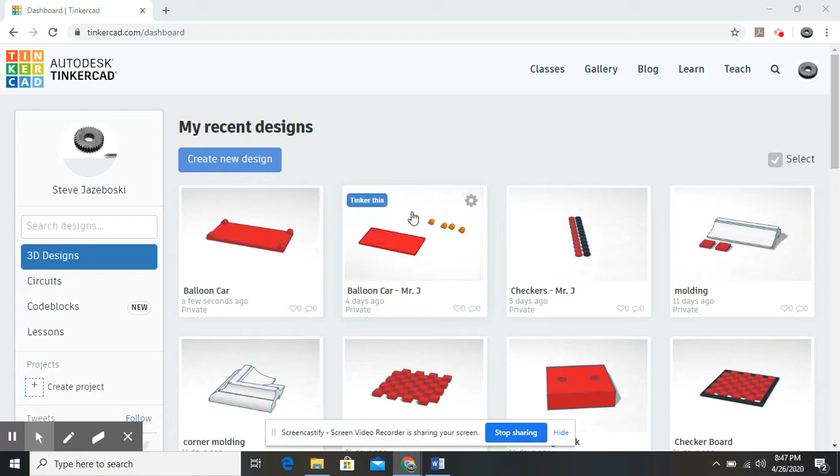We're going to start today by opening up our project once again. Here's the project we're working with. Remember, when you put the pointer over the top, you go up to Tinker This, you click on it, and it will open up for you.

Once this opens up, we should have the base that we created last time, and these 4 small cylinders that we're working with. From here, we're going to align these cylinders today, and we're also going to make the part that will become the axle that will go through both of them, which is actually more of a hole than an actual object.

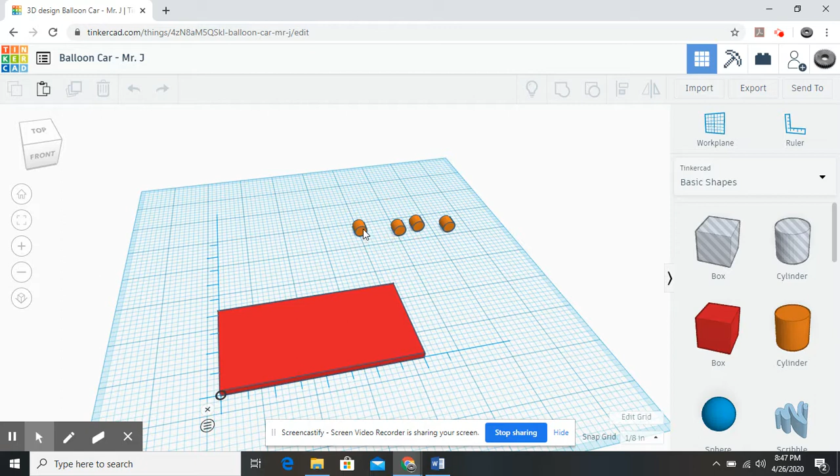So with this, we're going to start with our first small cylinder. We're going to click on this, and we're going to reposition it. This first one's really easy. It gets repositioned to 0x and 0y.

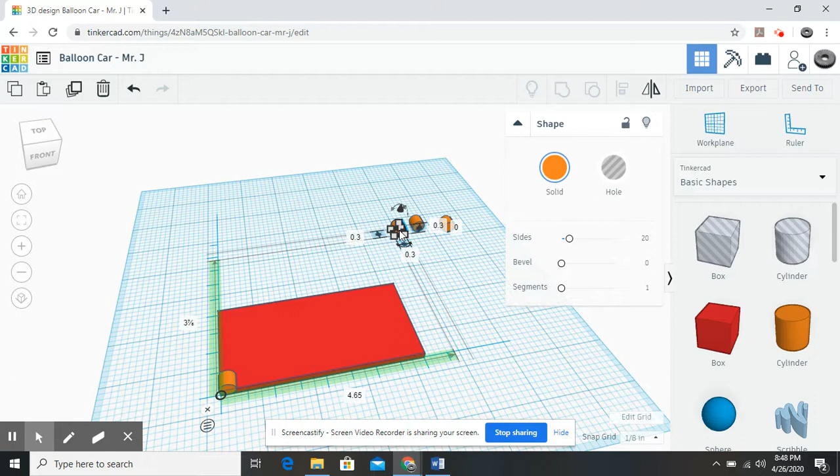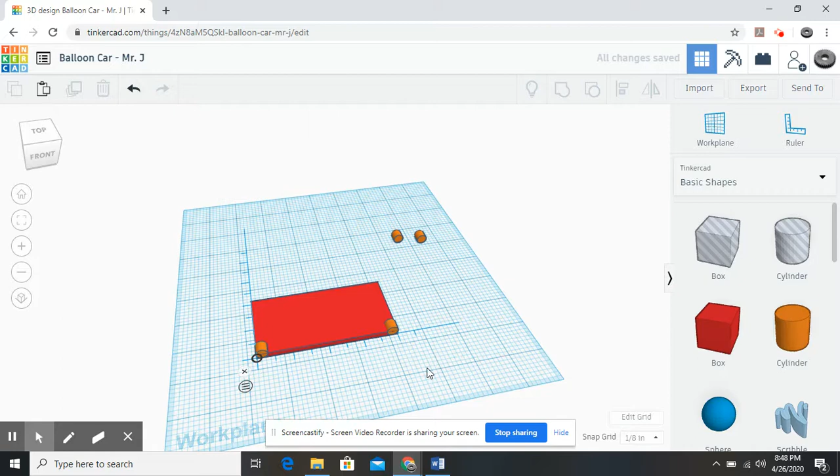Once we have that first small one positioned, the next thing we're going to do is click on the second small one. Our second small cylinder is now going to be positioned to 0y and 3.7x. When we have that in place, you can see that it lines up nicely with the back, nice and even. The front's nice and even. We're in a good spot so far.

Now, we're going to do the same thing with the third cylinder, but this time we're going to move it to the top left corner. So our X is going to be 0 once again, and our Y is going to be 1.7. That should be even with this edge as well as this front edge of the base.

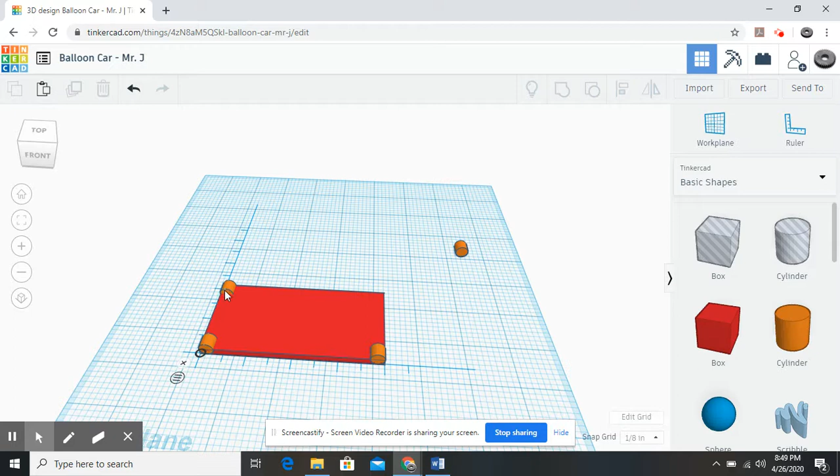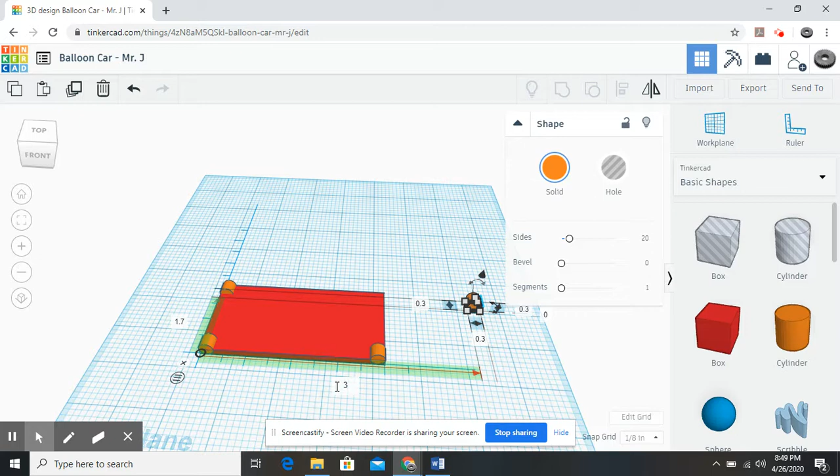We have one more cylinder left to do, the fourth cylinder. And with this fourth cylinder, our Y is going to be 1.7, and our X is going to be 3.7. So now we have all 4 of those put where we want them to be.

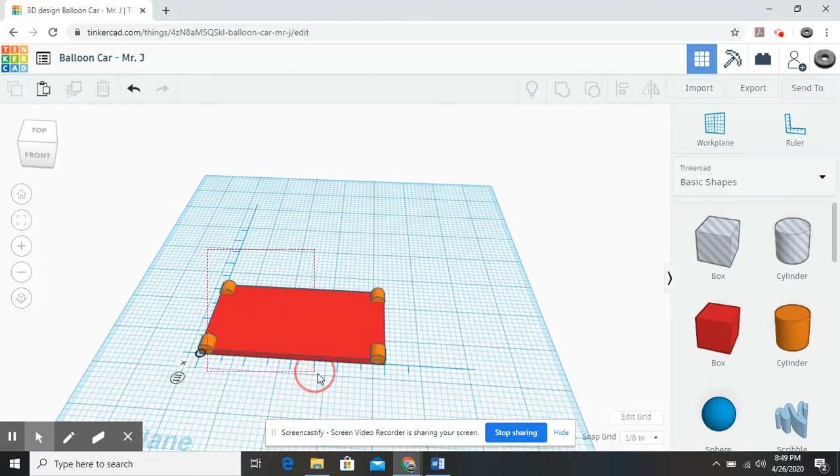Then we're going to group this, so remember to group it. We're going to move our pointer up to the top left of our base. We're going to left click and hold, and we're going to drag this open. When we release, it selects all the parts. Then we go up here to the group tool once again - it's right here, more towards the right of the screen. Click that, and it'll all become the same color.

So now we have the base and where the wheels are going to be placed. What we need to do now is make a space for the axle that will go through, which will actually be a small screw that will go through the tire. So to have a starter hole so we can put the screw in a lot easier, we're going to use this cylinder, and we're going to select the one that's the hole shape.

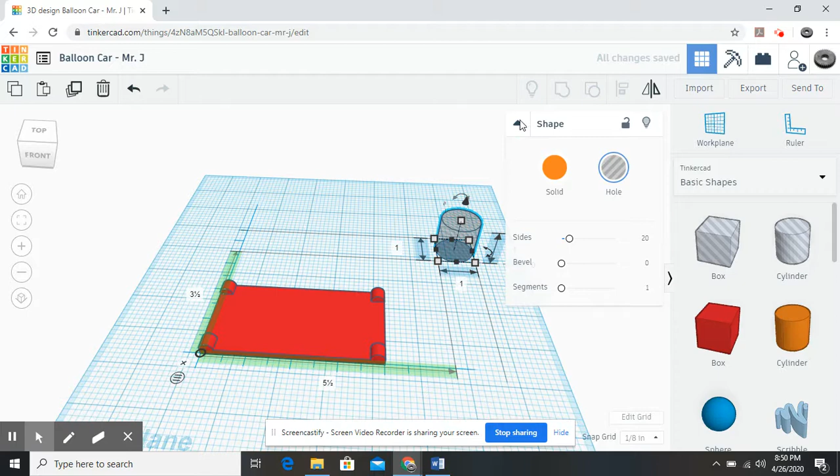We're going to slide this out. Now when we have this out, the first thing we're going to do is rotate this 90 degrees. We want to rotate this so if the cylinder's here, rotating 90 degrees makes the length of the cylinder parallel to the base.

So I'm going to select - you got your 3 little arrows. This one, you can see, would, on this side, this is more towards the X side, this is the Y side, and our one down here would just rotate it in a circle, which wouldn't do much for us right now. So we're going to go up here to the Y side. You can see it's parallel to our Y axis - that's what I mean by that.

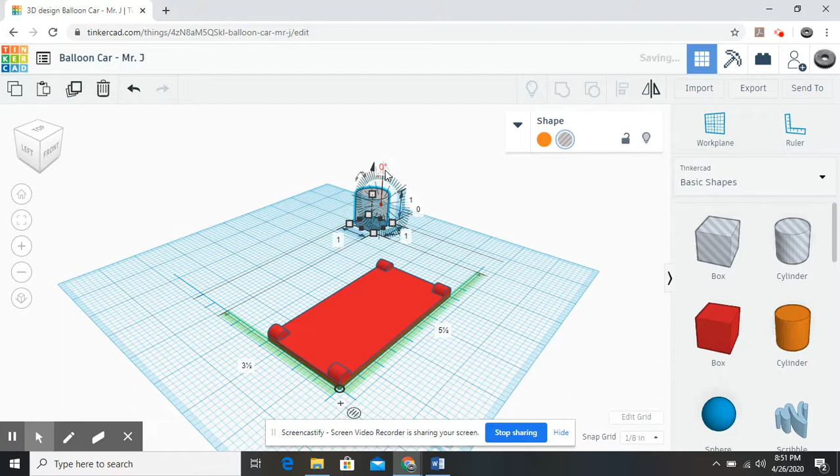We're going to click on that. We're going to go up to the 0, and we're going to change it to 90. Now we have our cylinder - the length is parallel with the Y, and the circular side is facing towards the X.

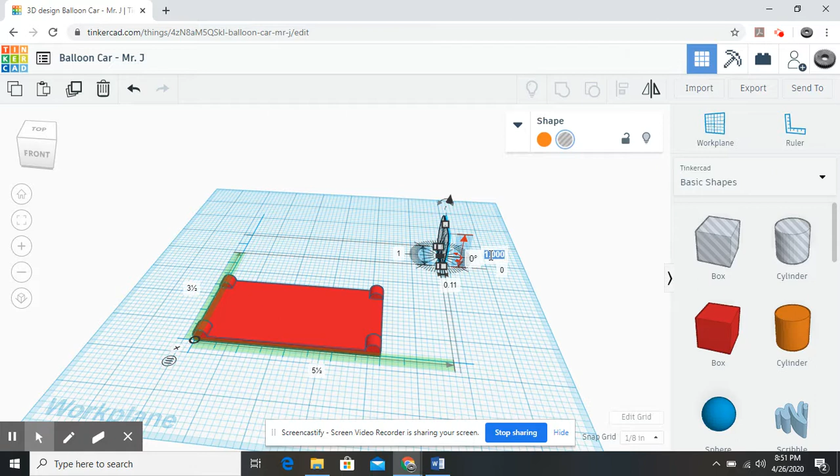Now we're going to select this again, and we're going to change some of the dimensions. First, we're going to change the width, and that's going to turn into 0.11. Then we're going to select the height, and that's going to change to 0.11. And the last thing we're going to do is the depth, and that's going to change to 2. So this eventually will put through the circles we just put in place.

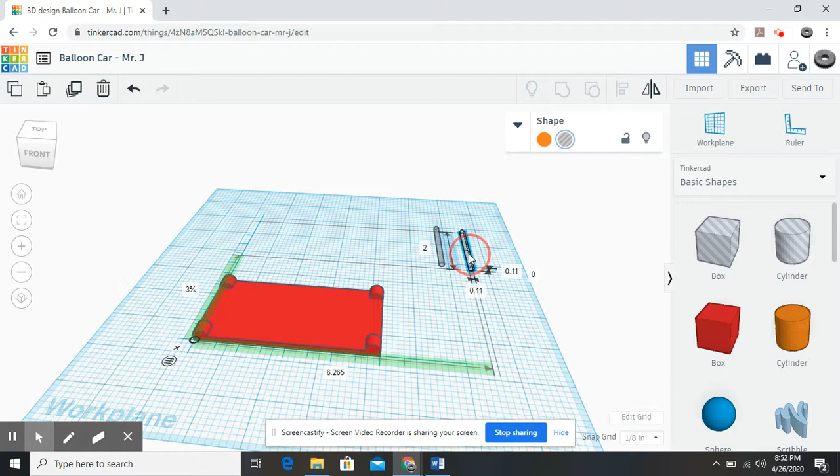We are going to need one for the front and one for the back, so we're going to select this again, go up to the copy - remember, copy is on the top left here, the 2 squares. Click on that, go to the paste. I always like to click off it, that way we don't mess up and accidentally change the size. And we're just going to change the position of that second axle. So we now have 2 axles.

And this is as far as we're going to go today. Hopefully you guys can accomplish this, get this done up to date. And from here, we'll move forward to the next step. Have a great day.